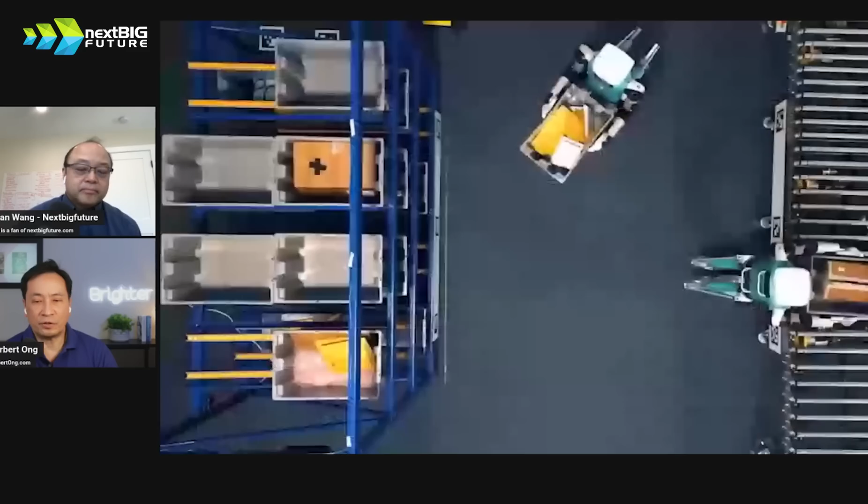Of the companies here, who can scale? Right now, Agility Robotics, Digit, and I'll show you what they look like here. They did announce, like you were saying, a RoboFab, the very first humanoid robot factory. This is going to be in Salem, Oregon. They're producing 10,000 bots per year, is what they were suggesting to do. And if you see this, these are a very, very specific pick and place.

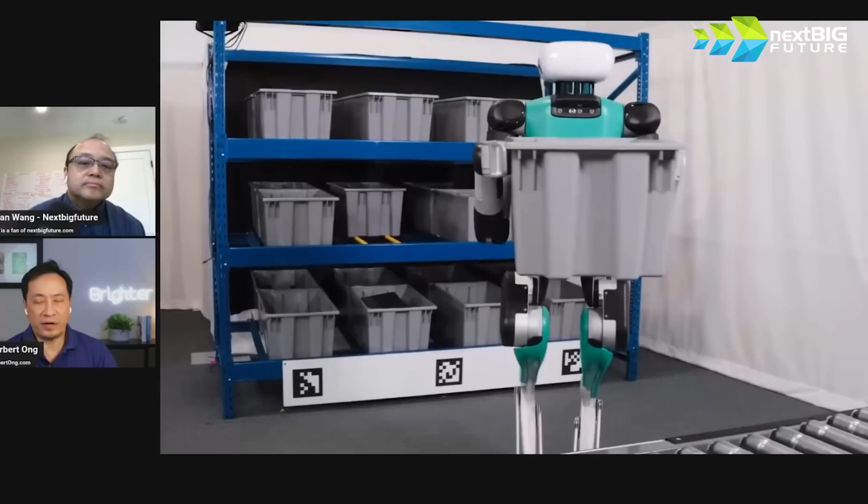Okay, before I get to here, let me just explain. There's Agility Robotics, which is what we're going to look at now. They've already made plans. They've not started the build, but they are planning to build it themselves, and they're already moving forward because, as you see, their bots are very simple. They're very specific for a specific use case. They don't have hands, and they're very lightweight. So they believe they can just start moving.

The other one that's possibly able to do this is surprisingly Sanctuary. Sanctuary is a Canadian-based robot company, and they partnered with a company called Magna. Magna is an auto supplier. Magna actually creates cars, they created the Fisker car. They can create a full car, or they can create the supplies for cars. They're a massive company in Europe and the US, and they've agreed to invest in Sanctuary, but also to actually do the pilots in their factories, and to then build the robots themselves. Now, everyone else has not yet announced how they're going to have their bots built, so it's Tesla, Agility, and Sanctuary.

These are the three that kind of said how they're going to have it built. Impressive. But several of them have a lot of money, though.

FigureAI has got $650 million from a mix of investors: OpenAI, Microsoft. Of course, Tesla has billions to deploy. SanctuaryAI and several others are in the $100 million range, been working on it for a while. Boston Dynamics has more money, $3 billion or more, more assets. And then the Chinese company Unitree, not publicly traded, is worth about $5 billion.

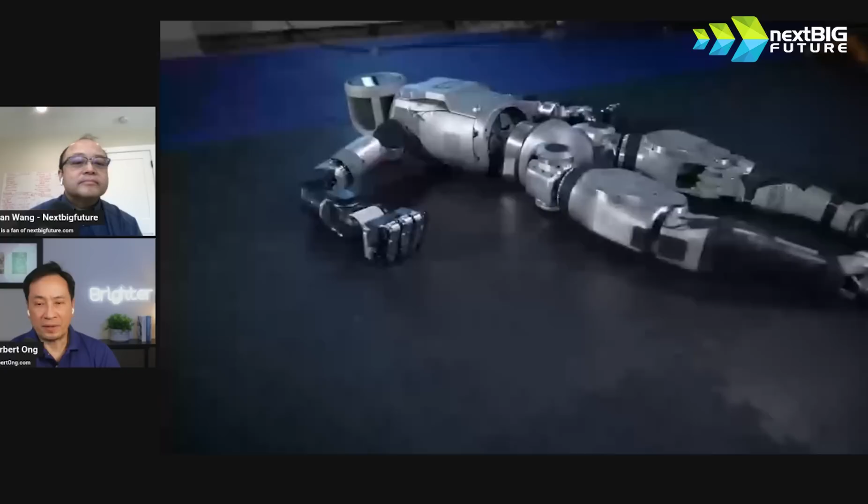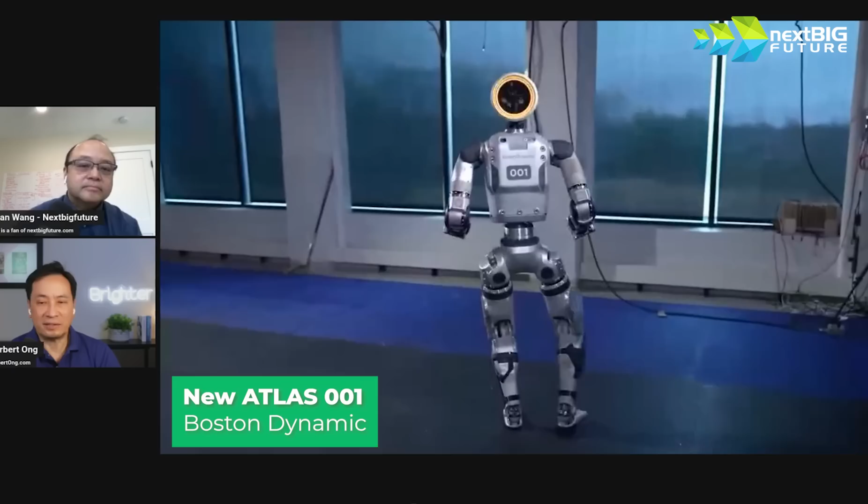Even their CEO was on the Lex Fridman podcast and told them there's no intention of creating the bot for commercial use. And then just last week, they dropped the new Atlas. It looks like this, and now this is much more in line with something that they would scale. They've shown that it's much more sleek. Now we don't know how many they've created, right? This is just to impress. It's a demo, but it's very cool. So this is the new Atlas, the new Boston Dynamics Atlas. They are definitely headed in this direction. Hyundai is a partnership of theirs, and Hyundai's the one who owns them now, and they're going to fund them and have them out there as well.

Okay, so I'll let you proceed with the other video that you wanted to show us to get a sense of what's going on here.

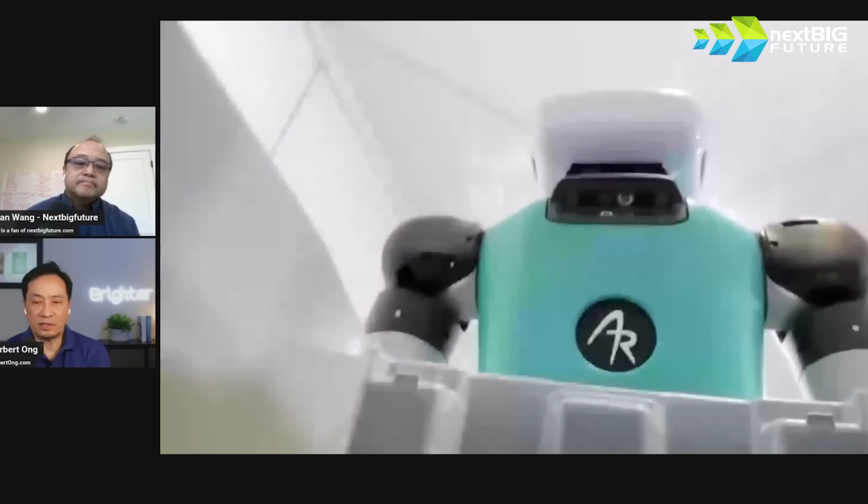Okay, so let's start with Agility Robotics, because like we were talking about, who actually has the scale? And if you look at Agility, this is their bot here, right? So you can see that they're very well designed for pick and place. So their goal is to just be pick and place in a factory.

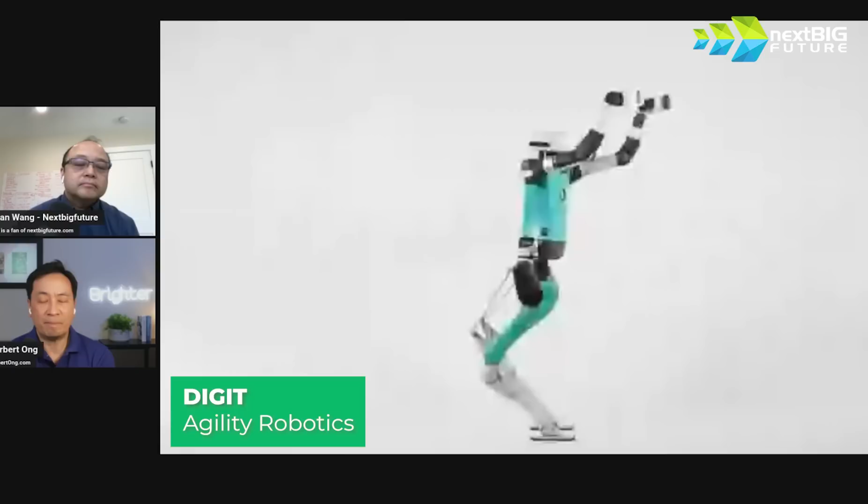I spoke to their executives, and what they said was, when they thought about the actual job, the use case, which is pick and place in a factory, they decided to let that first principle decide the form factor of the bot. So it wasn't their goal to create a humanoid, it was their goal to see what its form factor should be. That's why you see the weird legs, ostrich-like, bending backwards, because this lets them bend all the way down. You can see that they don't have hands because they don't need to if you're just grabbing boxes. The goal was to create something very easy and simple, so that's why they're already ready to go ahead and create this and all that.

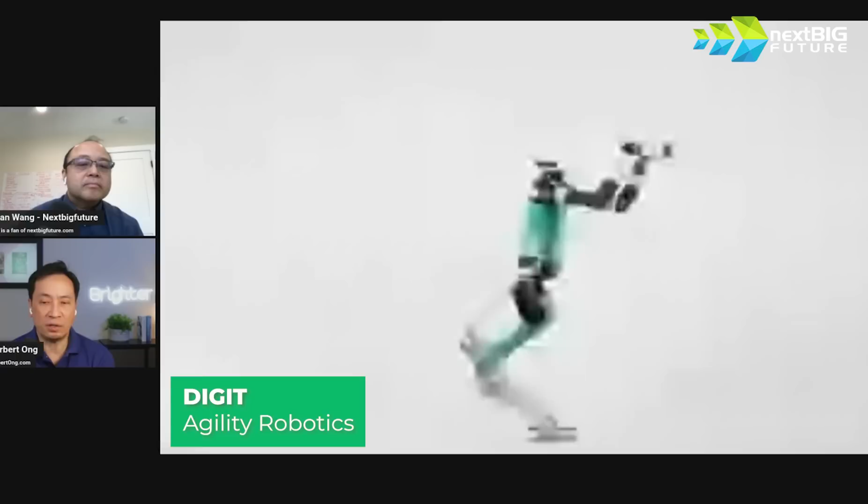So this is the pick and place. They go grab it, they move around. They're very fast, so they can move quite quickly, and they can have batteries that last 72 hours. That was the thing that they do that everyone else doesn't. Not that the battery will last 72 hours, but they showed already in a live conference, with humans all watching, 3 bots working around, that they were able to get those bots to continue working for 72 hours. I think it's still every 4 hours they have to go back and get charged for 1 hour, so it's not like they have a massive battery pack.

And they're deployed or piloting in Amazon's warehouses or other places. I've seen them there. Right? Agility Robotics, you can see that it's Amazon. They had an early partnership with them, and that's where they're at right now.

So no need for hands. Doesn't really need to walk like everyone else does necessarily. And they actually don't have a lot of autonomy or intelligence. They're just there to pick and place. So they're taking a very unique approach. They're very different, and they're already ready to sell. That's their goal, is to get out there fast and sell with that model.

For that market of pick and place warehouse factories, that supply chain area, also delivering things like they show them coming out of vans and delivering things like doing an Uber Eats kind of thing, or an Amazon package delivery. Those could all be very large markets where you could end up using hundreds of thousands, potentially even millions of robots if you succeeded with that.

Amazon has over 1 million of the Roomba-like robots they've had from Kiva that move shelves and pallets so that they can get our products to us. So Amazon is already deep into robotics, and they're playing with many of the different humanoid robotics form factors. Yeah, because they potentially could.

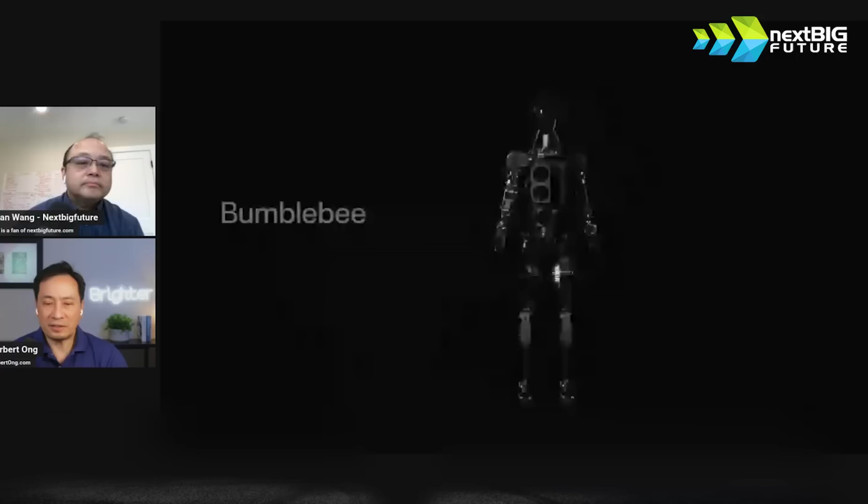Yeah, so let's keep going here. So you've got, let's start with Tesla, of course. They're the ones that - you want to just show them the Teslabot. Tesla has clearly progressed so quickly. It's one of those things where everybody laughed at them when they first started this 3 years ago. But now look at where they're at today, right? This is December, so this was 4 months ago.

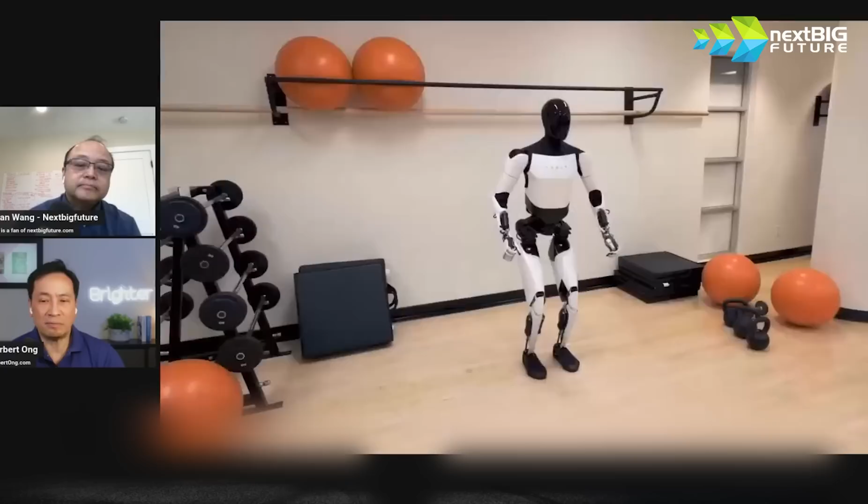And it sure looks like already here that it's design locked. I mean it's clean, you don't see any cables hanging out. It's got the right form factor to be able to do all movements. And of course the most important thing is the hands. If you can see the hand movements, they've tested it - they can be used to fold clothes, and it's got finger sensors. Only a few of these bots actually have that - some of them are removing finger sensors, or some are adding finger sensors. Tesla decided to put them in there so they can have a lot more skill, to be able to even manage clothes and eggs in this case.

Many of these bots, you'll see them walking slowly, and they purposely don't try yet to do speed. They're focused on form factor, they're focused on autonomy, and then I don't think speed is actually going to be that difficult. We've already seen another company drop a video of how fast - like Unitree - how fast they can run. Unitree, yeah, if they wanted to, they could do that.

So that's Tesla. Obviously there's a lot more to talk about with them, but they're the leaders in everything, right? They're the leaders in hardware, they're the leaders in the hands, they're the leaders in autonomous work. And then of course they've got massive ability to actually integrate them. They've announced that they will have the bots in the factory. They're in a pilot right now today, but it'll be in the factory by the end of this year, and it'll possibly be sold to customers by next year. So we know that they're going to be the fastest to produce hundreds of thousands of bots before anyone else can do this.

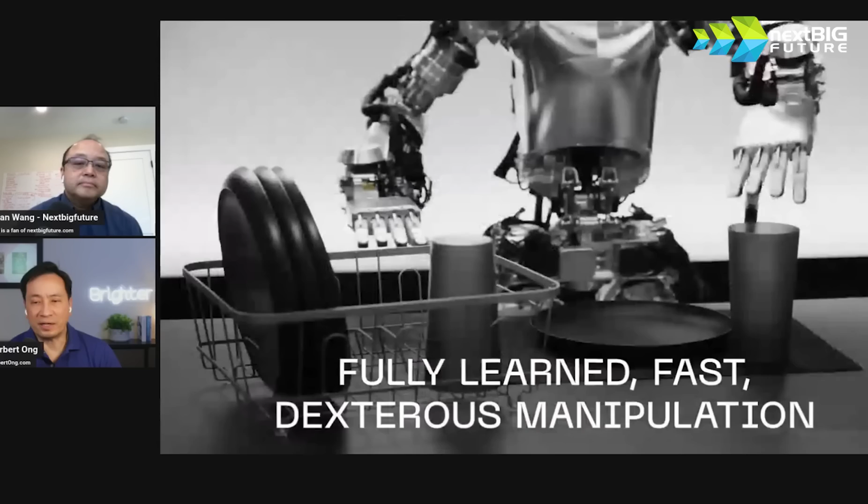And they showed off an LLM voice integration. So let me share that with you. This is what their bot looks like, it can actually... I'll show you the actual video because it's important to watch this.

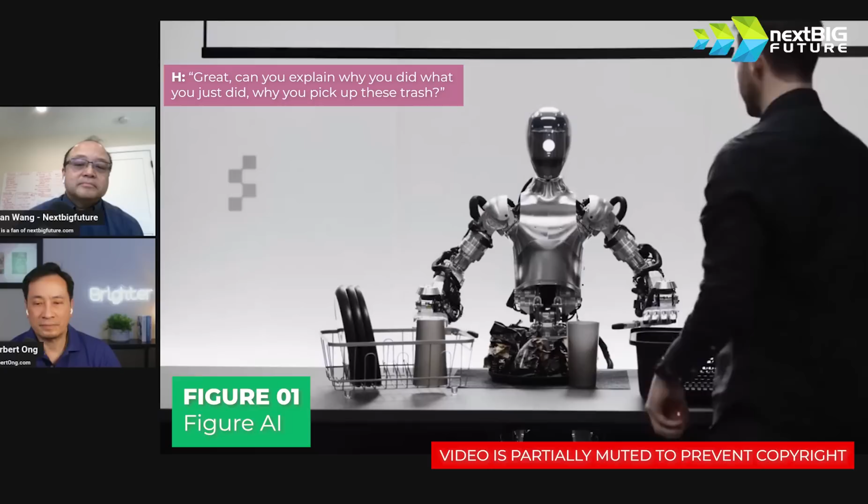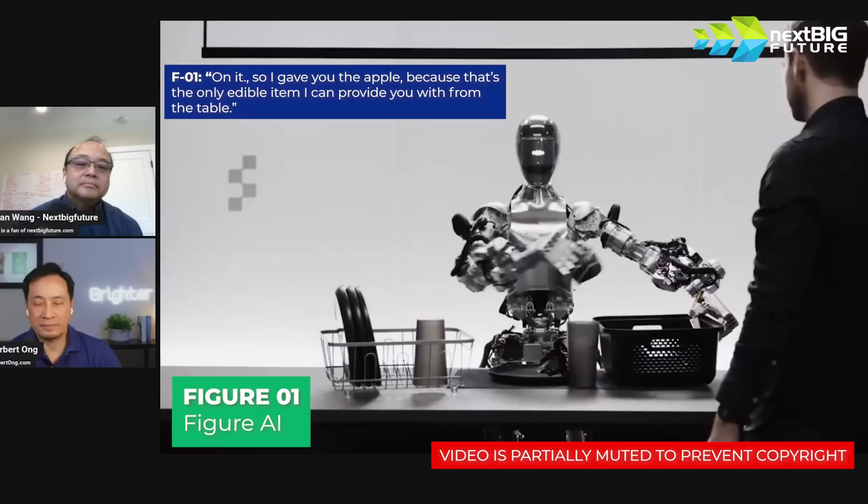Okay, so you can see that was very impressive, because not only do you have a bot that can actually move and handle figures, move things and grab things, but you can talk to it and it can understand in space. That's an apple, those are dishes, those are rags. I can actually, while I'm talking back to you about something you asked me earlier, the apple, why did I do this, it's being able to do that.

Very impressive. I should mention that of this list we were looking at, what you're seeing is that Tesla is not partnered, they don't need to partner with anybody. They've got their own chips, their own LLM and voice integration, and their own building to be able to build it themselves. Of these other bots here, they're partnered with NVIDIA, not only to provide the chips, but also to give them the warehouse, the data centers, the LLM, and the simulation area tools to be able to teach your bots through simulation. Almost every one of these is partnered with NVIDIA, and some of them are partnered with OpenAI to actually get the LLM and voice integration.

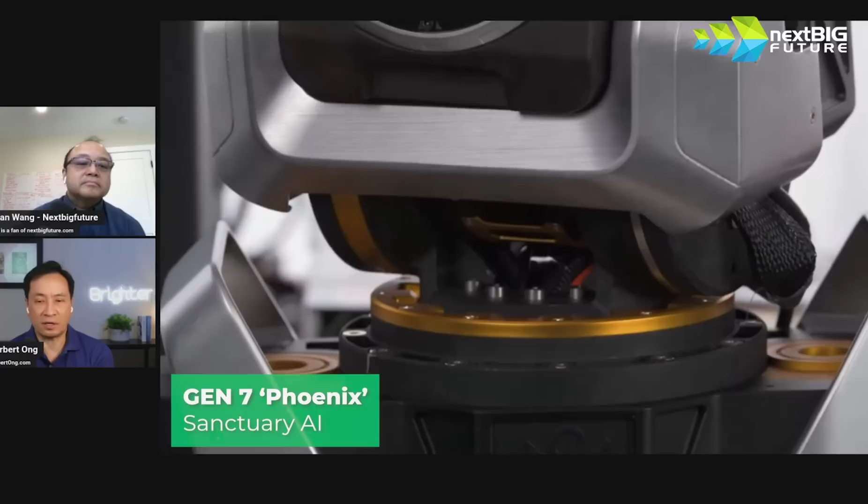Okay, so that's Figure. Then I've already showed you Agility. SanctuaryAI, I just interviewed their CEO, very interesting what they're doing. This is what Sanctuary looks like. They're in Canada, and in the last 2 months they partnered with Accenture, Magna, and then Microsoft just a few days ago. So Microsoft's going to give them the AI, Magna's going to be able to build the bots and pilot in their automotive supply chain and invest in them, and Accenture will introduce them to companies.

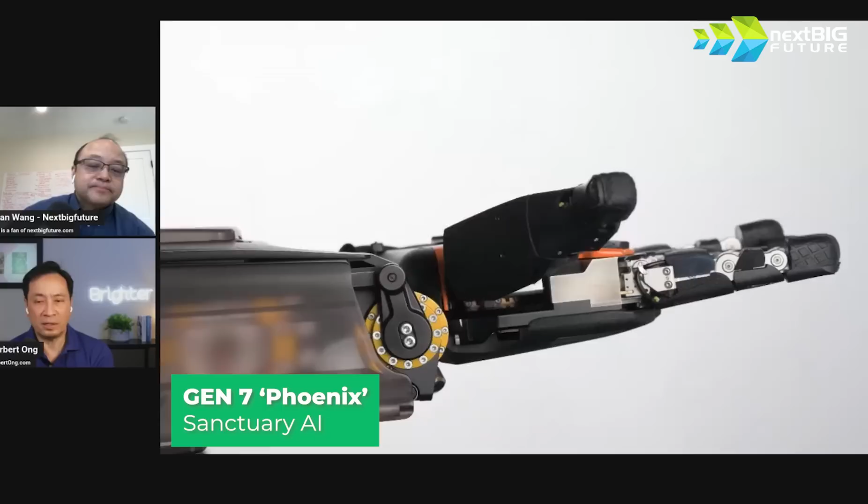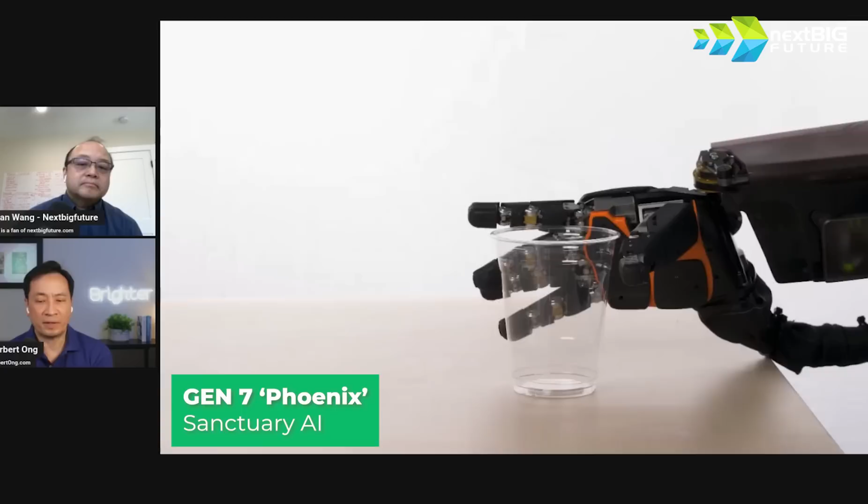So these guys are so focused on the hands, you'll see that they have not yet actually shown you the legs, because the CEO said we don't think legs are that important, a lot of, 90% of useful work is through the hands, and so that's what they focus on. They feel like they have the most advanced hands there are, and they're focused on the intelligence. That's what their bot is showcasing here. You can see that it still has large cables, so they're in generation 7 of their bot, but they're moving quickly.

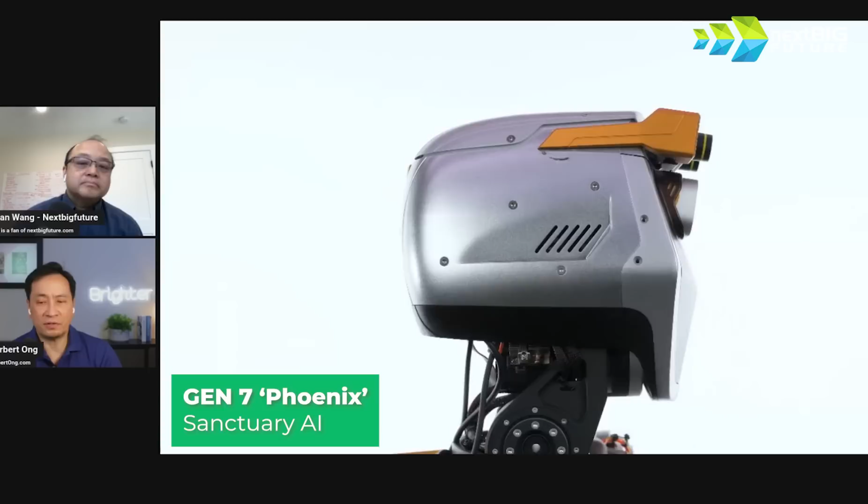Every 12 months they create a new generation of their bot, so they're already in Gen 7. They've still got work to do, but they're going to do this. The CEO believes they are ahead, and what was very interesting was he said the very first company to get 1,000 bots will be the leader. He's very confident with the partnership with Magna, an actual manufacturer, that they could get there first, because the issue is that if you're a humanoid bot, you need 1,000 or more to actually experience reality, because there's a lot of belief that simulation only is not going to get there.

You can simulate—I think NVIDIA has this demo where they simulate a pen rolling in your fingers—but then when you actually give the pen to the real humanoid bot, they don't exactly do it perfectly. They need that last bit to actually feel and touch something before they can learn it. So you need simulation to get you 90% there, then you get the real world experience, and then you'll be able to learn something. So whoever gets to 1,000 bots first can possibly lead further.

Yeah, that's Sanctuary. A couple things—one, watching your videos, interviewing Geordie Rose, the CEO, which is great. I met him when he was at D-Wave, the quantum computer company. I went to his office in Burnaby and talked to him.

He said the problem with simulation currently is that it doesn't handle collisions well—like the physics of picking up something, making sure my hands aren't going through it, that kind of thing. That is a problem. The surface stuff on walking is more aligned, where those physical problems don't matter as much, but not having the physics of collisions is the problem for those things. You see this in some OpenAI and other diffusion models creating videos where the physics just don't work—things pass through each other. You can have a picture of a person with a unicorn where the unicorn's horn is going through the guy's head. The physics is wrong, so that's the problem.

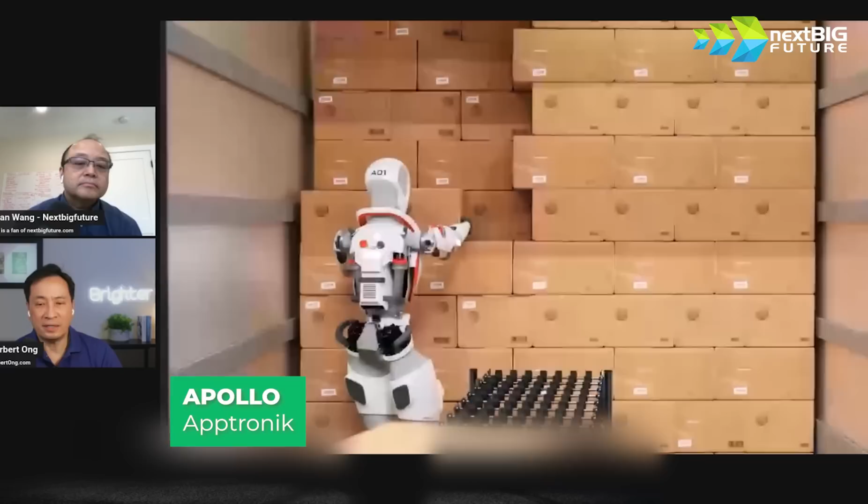This is the partnership with NVIDIA. They're able to show that through simulation and teleoperation, they can teach the bot. Autonomy is something almost all these bots have shown—they can teach a bot to be autonomous after a little bit of training through the three ways I've explained. So that's Apptronik, and you can see they do have legs, they can walk, and they've been able to show pick and place as well. So they look pretty good.

They look like, you look at their form factor, they're already basically design locked at this point. So that's Apptronik.

Then you've got 1X Technologies. These guys are very interesting. Hold on, I don't have a video queued up for them yet. Oh no, I do. So here's 1X. 1X Technologies is based in Norway. I met with the CEO, interviewed him, and they're very different than all the others.

What's really interesting about them is they purposely are going after consumer, the home first. Everyone else is going to the factories, going through businesses. He believes that in any kind of revolution in technology, it always takes off first, goes viral first in consumer, and then it trickles down to enterprise.

It's rare that it'll be something that enterprise adopts first and then consumers do later. And so when you look at his bot, everybody looks at it and goes, oh my God, this is like a child's toy. It's ridiculous, until you understand what they're trying to do.

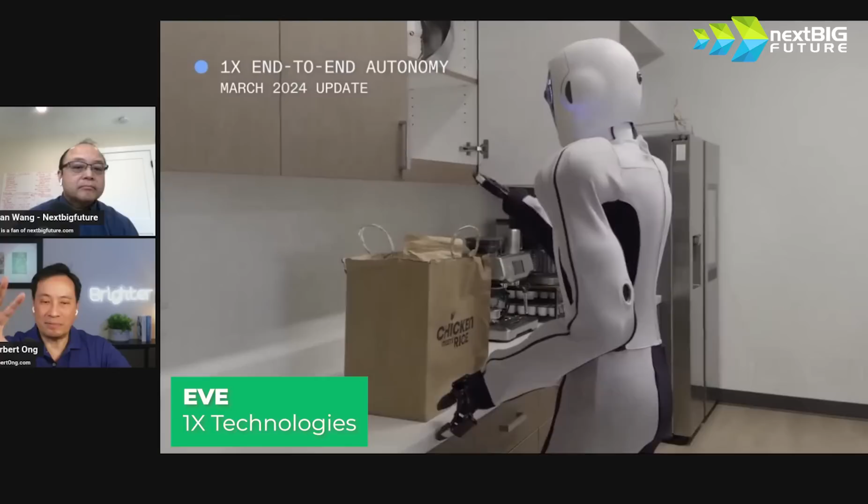So his bot looks like, you see it's covered in kind of a mesh thing. They actually don't have actuators. The actuators are those metal kind of machines that bend the fingers, bend the arms, bend the wrists, and so forth. They use tendons, and he wouldn't tell us exactly what the tendons mean. But the purpose is that it's only 66 pounds.

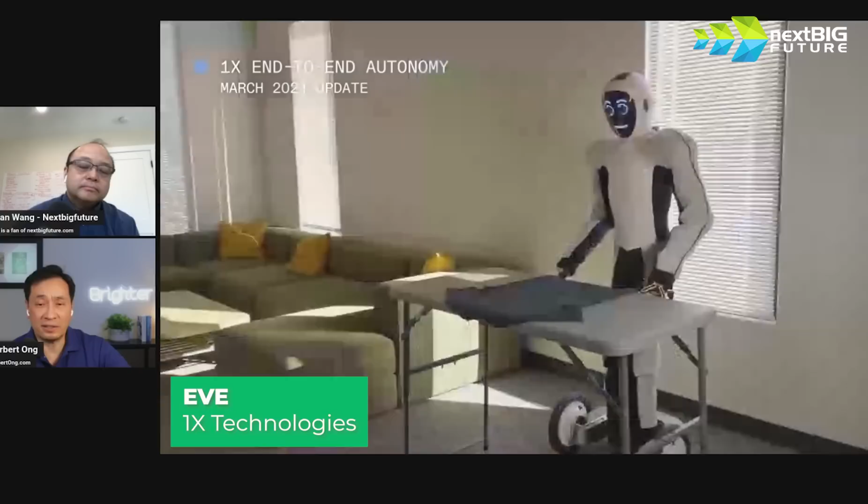And the point is that you can be at home, it can work with you at home, and it can't hurt you in any way. And their goal, they already have pilots in the home. He's actually beta testing this in the home. So that's why it looks this way, and that's why it's got the eyes this way.

It's more pincers on the hand in this case. It looks like a thumb and 2 fingers there. It's not a full hand.

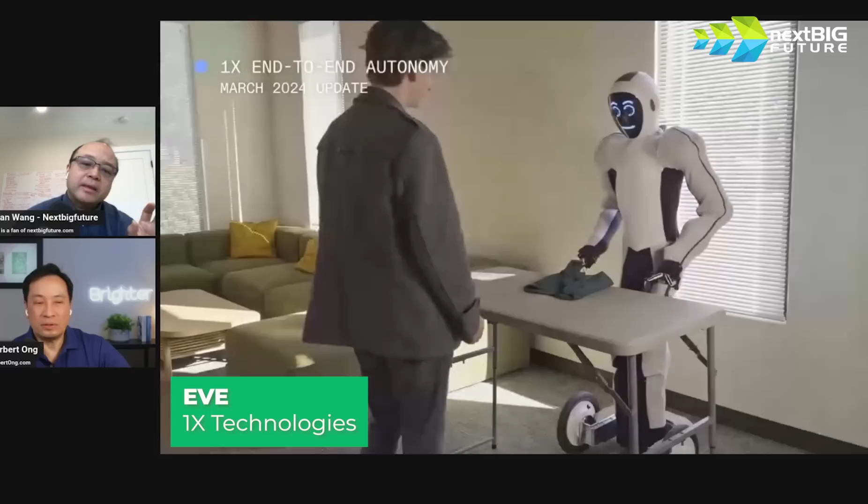Just to be clear, this is called Eve. This is their first bot, and you see it's got wheels. But they are planning to, this is not the bot that they're going to make thousands of, and he's indicating he's going to make thousands of this next year, the following year. But look at this, even just the pincers are able to fold the box at the top.

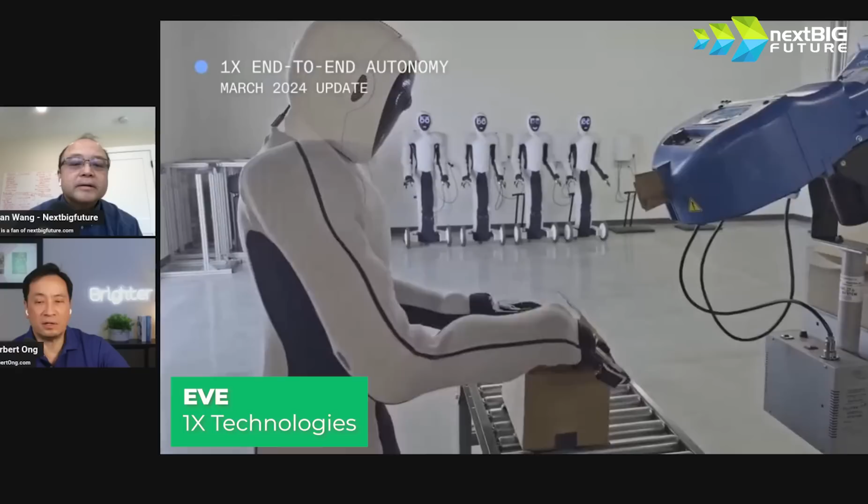The boxes. So they've got a version called Neo. The Neo has humanoid fingers, it has hands, and it has humanoid legs and feet. And so that's the one that they're going to go full out with.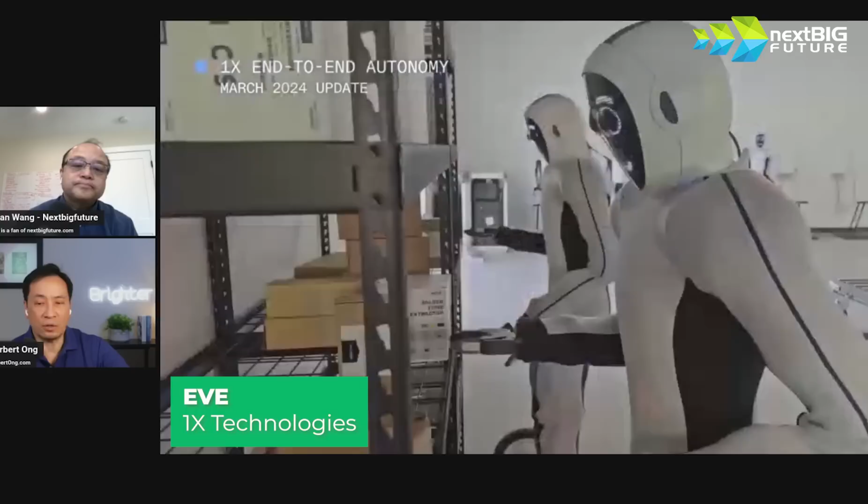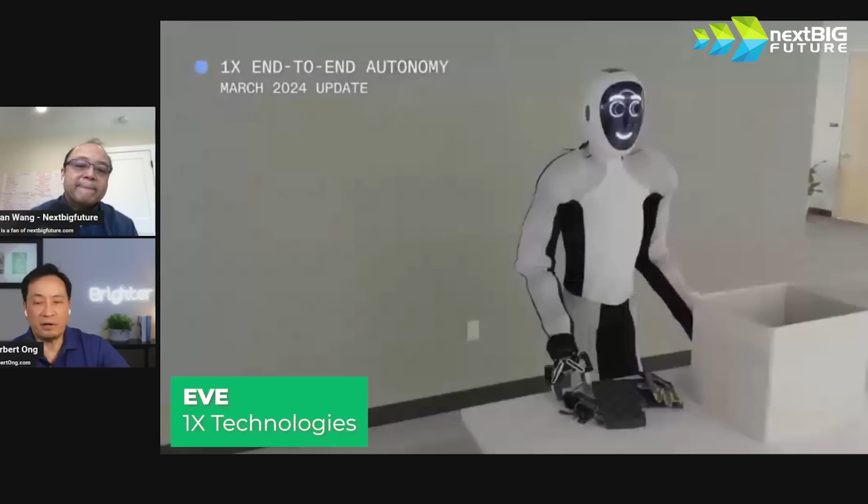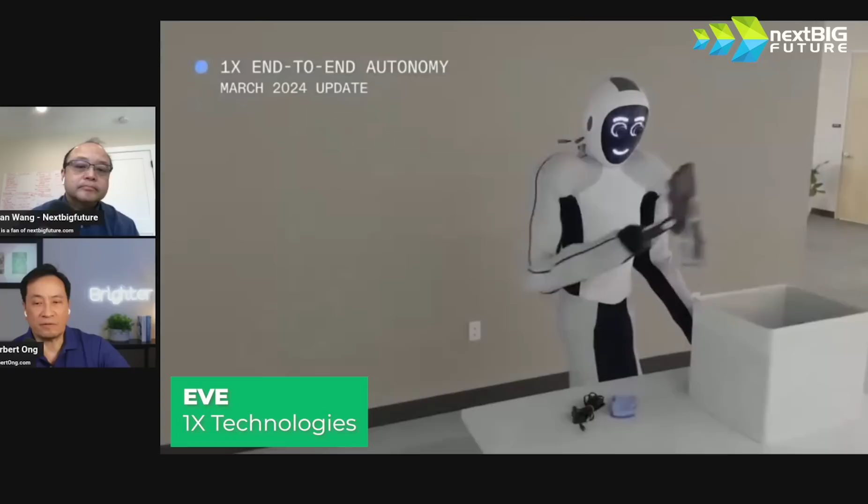So the problem with the wheels, and only Sanctuary was the one that said, hey, we don't think feet are necessary. But the problem with wheels is that it's bulky and it can't get in, it can't go upstairs. And how does it work in your home? So this is not the form factor that they're going to take to the home, but you can see that's how they designed it.

And then for now, the pace at which it's loading is not up to human speed. But as you said, they can increase that speed, and some have. I think Sanctuary has increased the speed of the arm motion, not just the walking, but the arm motions that they have.

So definitely getting to thousands, having applications there, getting into the home. I could see that happening.

The question of a use case, where I'm folding clothes. I know that with pincers, even a very low cost team of 3 Stanford PhD students were able to use a pincer-only arm movement to cook a 3-course meal. So you can do human actions with those pincers.

But the question then, going to the house first, is making something useful for, say, elder care, or just something that's fun and cool to use if you hit the right price point. If you want to have big success, you'd have to handle some use case really well. So what do you think on that?

You're absolutely correct, it's a lot harder to win in consumer. That's why it's shocking that he's doing this. Like you said, what is the use case, and what's the price? If it's a consumer product, nobody's going to pay $30,000 or $50,000, it's got to be like $10,000. But if it is elder care, that could be a pretty good use case. People are willing to pay $10 or $20,000, but it's got to do things that I don't know. That part I don't know. It's interesting.